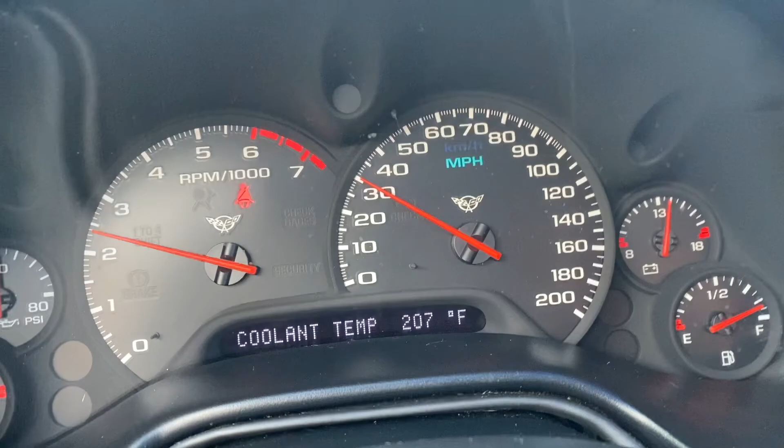Everyone, welcome back. I am back in Bandit, the C5 Vette, as you guys can see. I mentioned a couple times that we're going to be getting this thing tuned.

There's a bunch of different ways to go about getting it tuned, and sorry if this gets really loud.

The way we are going to go about it, Calvotuned is going to be helping me out with the tune for this, so big shout out to him, getting into more detail about him here in a little bit. He's going to be remoting into, and it's not even my computer, it's a friend's computer, which I'll also tell you a little bit about shortly.

He's going to be remoting into his computer and actually tuning it as we drive around. For our instance, that was the easiest way to go about it.

My buddy Mark Tischler, we're going to be using his MPVI and HP Tuners to get all this done. Mark is a friend of ours, been a family friend for a while. Him and his family own Tischler Racing Engines, which is a local racing engine shop. Big shout out to him for lending me a hand. He just happened to have all the equipment that I needed to get this done.

So he went through, and I mean every single parameter that your factory computer has. I was actually blown away at how much was actually in there, and how many protective things the manufacturers put in your tune to protect your car and make it, I guess, super reliable all the time. Some of it was extremely excessive, and what was really cool is that as he was going through everything, he explained what this did and what that did, and so on and so forth.

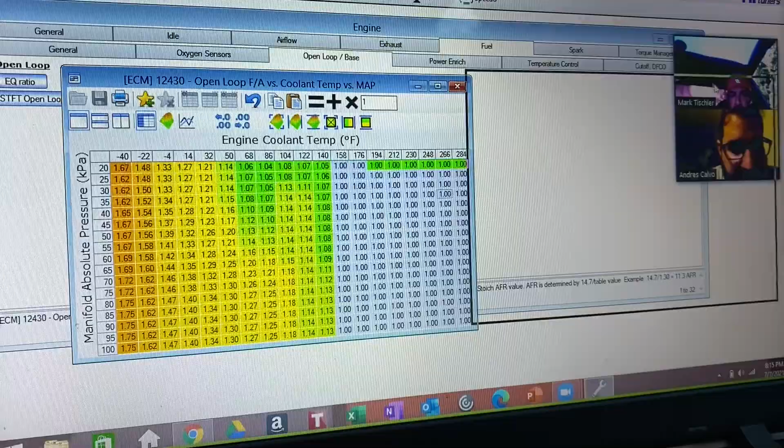Big shout out to him for doing that. I learned a ton, Mark learned a ton. As he was going through it, he was explaining, and he went through every single thing. Now, the car was not running, we were not driving or anything like that. This was just him going through all the parameters, his checklist, everything like that to get it a base tune, I guess you'd call it, for us to go out and do pulls.

That took some time, and it was super hard to video it all because it was so much information that it was unreal.

Once he got through everything and had a pretty good base tune, we went out and drove it like a grandma. He watched everything, checking air fuel ratios, knock, timing, fueling, all of that. Once he thought everything was good, we went back to home base and he made some changes.

We went out and did more pulls, made some more changes, and he could record it on his end so he could go back and look at everything he needed to look at.

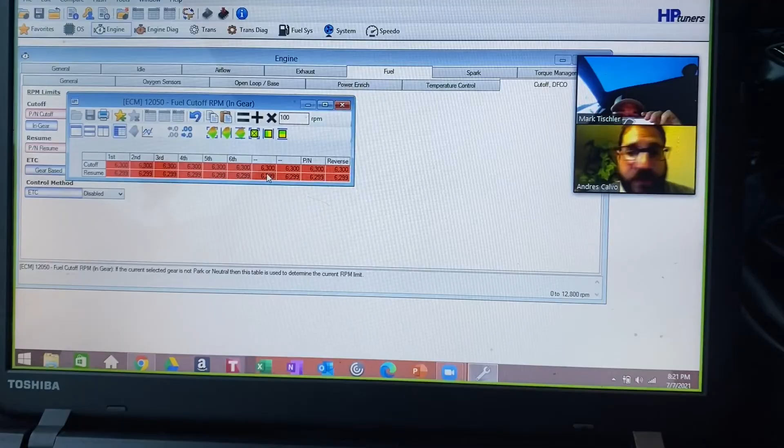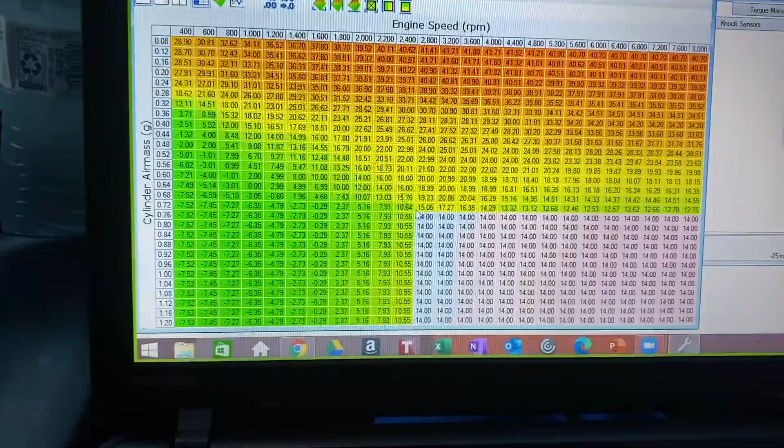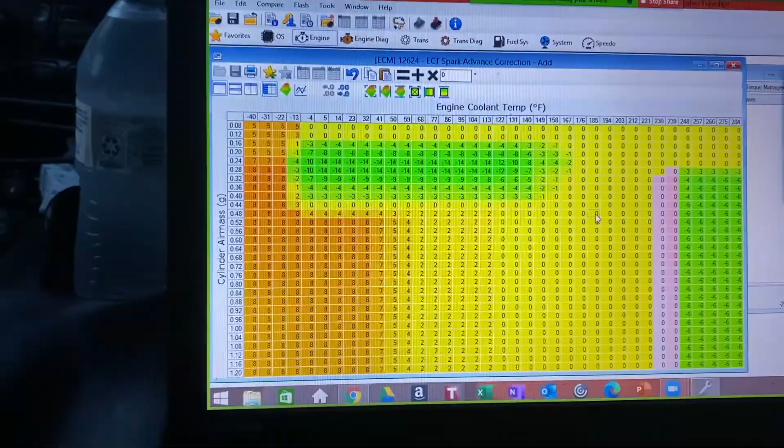We started with little quarter throttle pulls, then half throttle, then 60%, then 70%, and so on, kind of mimicking what he would do on a dyno if it was a dyno session. Little by little, with me as the driver, we kept adding more throttle percentage. After 3 or 4 sessions, we were all good to go.

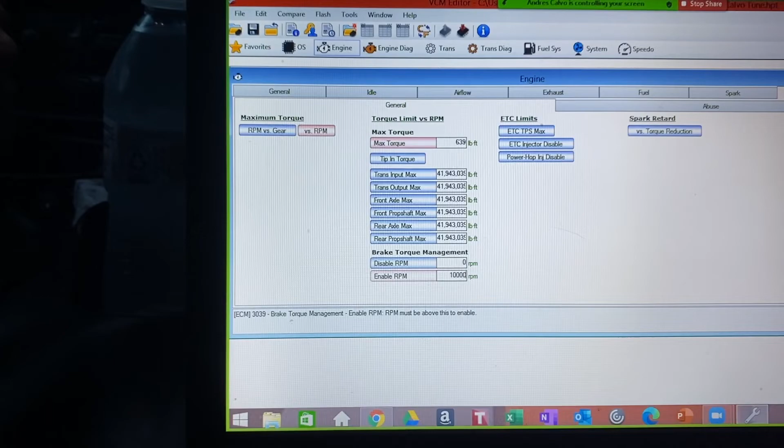So the car now - that was almost like a month ago. Now, especially because I've driven it a ton, it's completely different drivability-wise, power down low. It's a rowdy little piece, and I'm super excited about it.

My arm is tired from holding my phone.

It's tons of fun to drive. Honestly, it's become my daily. I'm selling my Volkswagen because now I'm just going to daily the Vette, and Ron's going to get thrown in there when I need to tow something, or depends. But the Vette, it's awesome.

It didn't affect gas mileage at all. I've done a couple trips down the shore since then, and I'm still getting 25, 26 miles a gallon - I can't even say the miles per hour, but really fast - and it just runs perfect. Fires up, idles good, everything's good.

On top of everything he did, he also turned the cooling fans for the radiator on a little bit earlier, so it runs cooler, everything. He really hooked it up. I can't say enough good things about him.

He's based out of Florida, and obviously I'm in New Jersey, so it wasn't like he could show up to my house and we could go for a ride. That's why we did the remote tuning, which is huge. It doesn't really matter where you guys are - if you need a tune and you're in California and he's in Florida, just do the Zoom-type remote tuning like we did, and you'll be good.